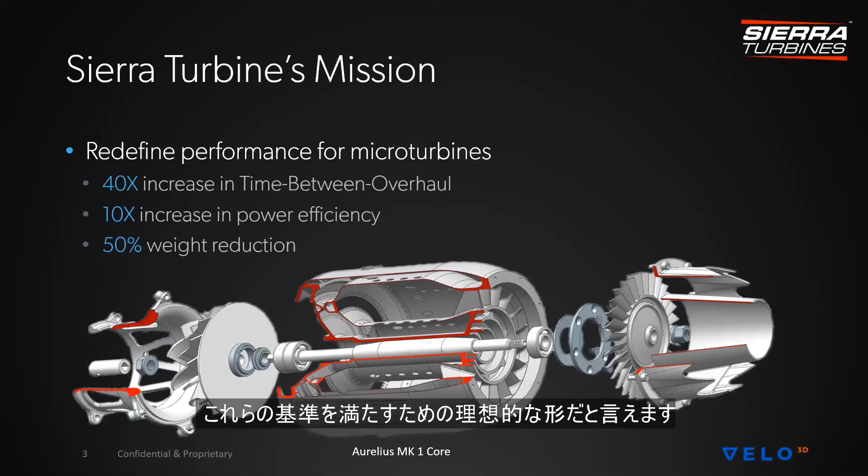So why additive manufacturing? Additive manufacturing allows us to do part consolidation. For a micro turbine, reducing 61 different sub-assemblies into one is enabled by additive. By that, we're talking about the fuel injection, bearing housing, conformal cooling channels, and conformal oil lubrication channels. So it's a significant consolidation of different assemblies into one unibodied assembly that allows also for lightweighting.

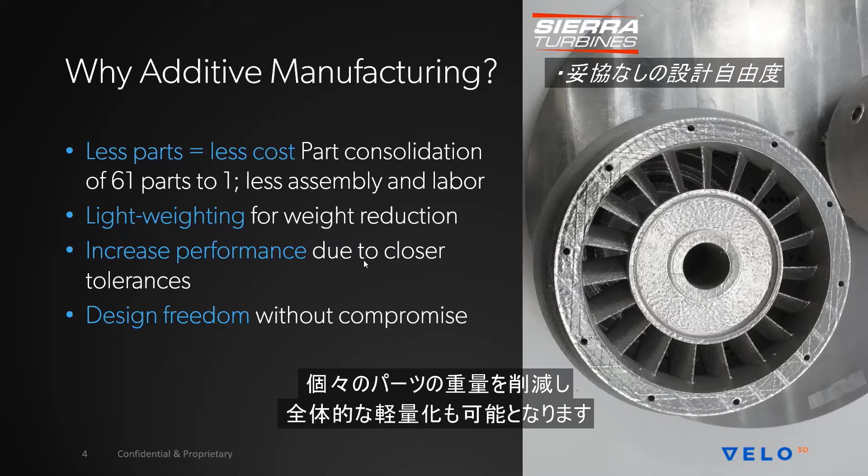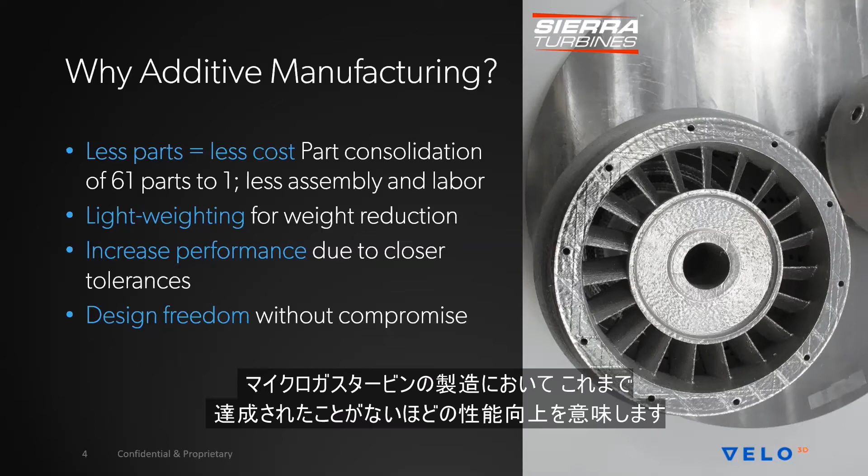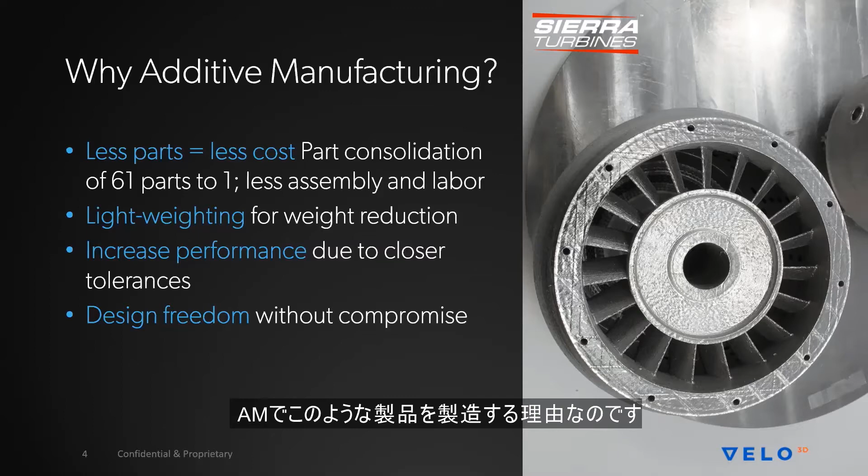By reduction of the individual components, we can lightweight this part where, compared to existing competitive engines in this category, we've cut the weight by 50%. For aerospace applications, when you cut your weight by 50%, that's automatically part of the increased performance that has never been accomplished for these small gas turbines. It's the design freedom of the Velo platform, it's the design freedom with the nTopology platform that together is the why additive manufacturing for this level of a component.

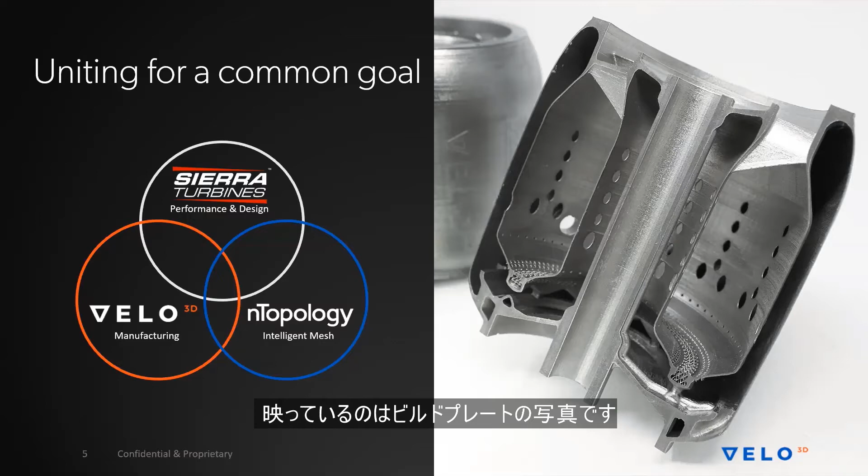And so the uniting for a common goal. I think sometimes it's difficult when you see metal parts, you don't have an appreciation for what post-processing may have been involved. What we're actually looking at in this photo is, right off the build plate, there has been zero post-processing because the Velo platform is a support-free, non-contact recoater blade system. This is testament to the work of Sierra Turbines, Velo3D, and nTopology as to how we were able to build and produce multiple parts, multiple engine cores using this advanced workflow.

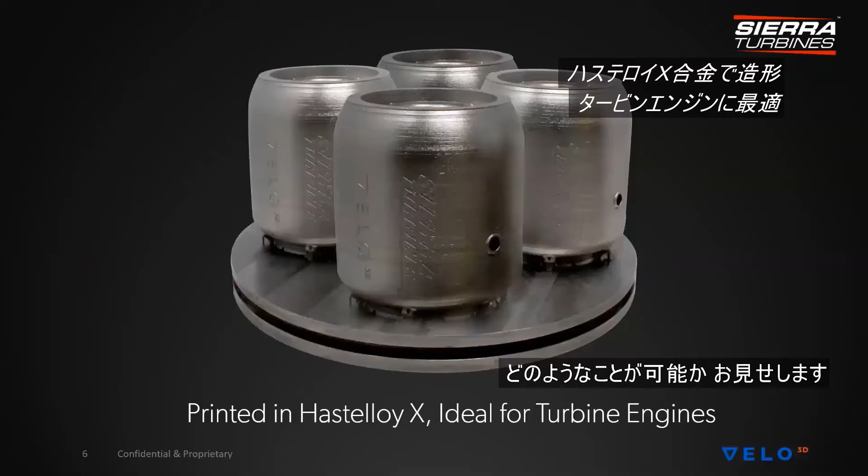As proof to what's absolutely possible, here is essentially, right out of the Velo3D Sapphire build system, we're able to print multiple of our engine cores at once.

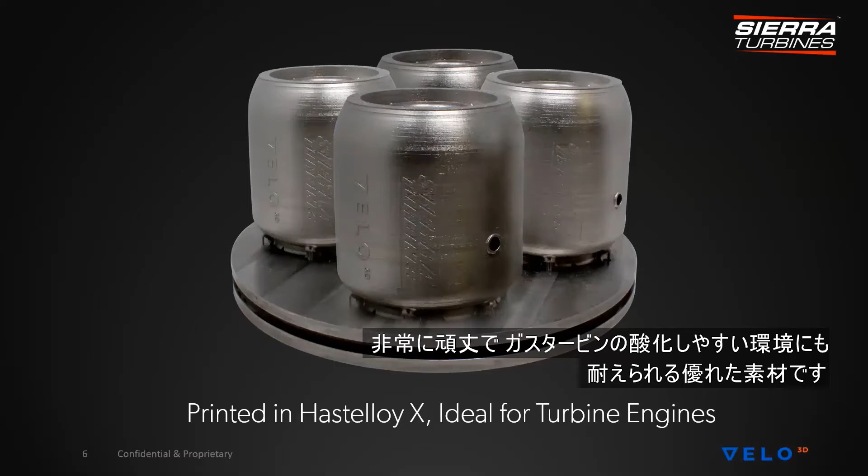I want to talk a little bit about Hastelloy X because we're pleased that this is the commercial launch of Velo's Hastelloy X platform. Hastelloy X is the material used today in existing gas turbines that are operating for thousands of hours. It's an incredibly robust material in which its performance in the highly oxidative environment of a gas turbine truly excels. We're pleased to be working with Velo to be able to showcase what is entirely possible right off of the build platform.

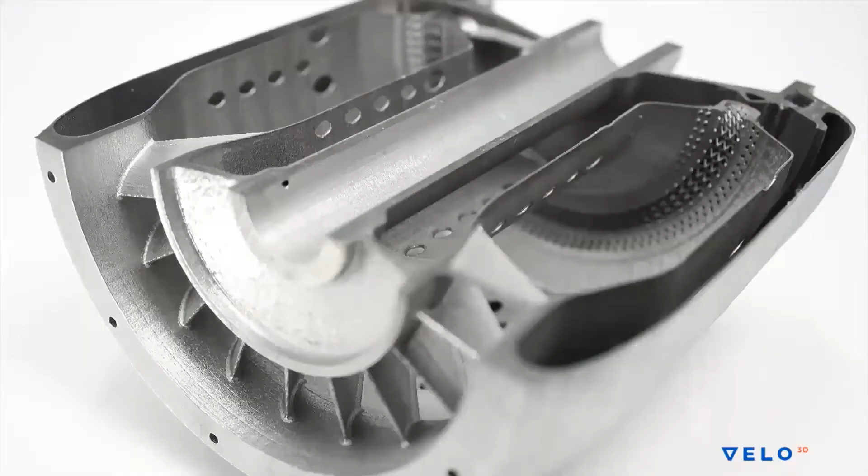Here's testament to the support-free, non-contact recoater blade system on the Velo3D. This represents zero post-processing. And what is particularly important to Sierra Turbines and also to the manufacturing of microgas turbines is what we call the gas path. This is a very close-up and real possibility of what's possible.

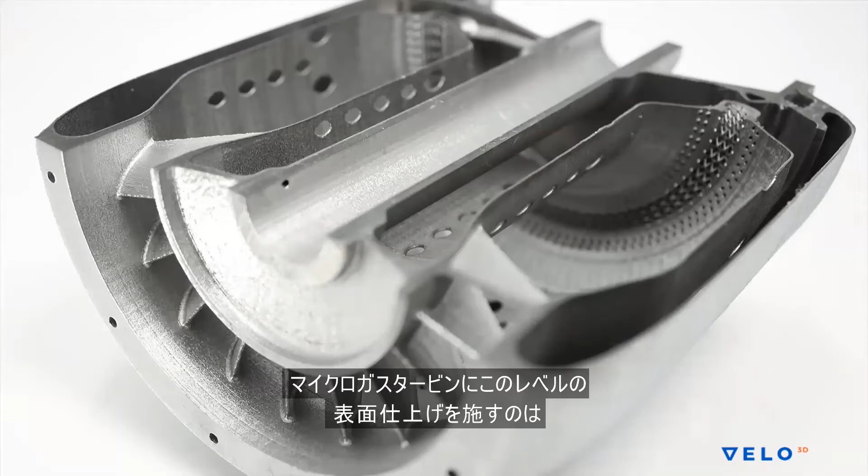Here we see the turbine inlet vanes as printed. There's zero post-processing on this image. And we believe this is literally the first time in history that you've been able to get this level of surface finish on a small, compact gas turbine.

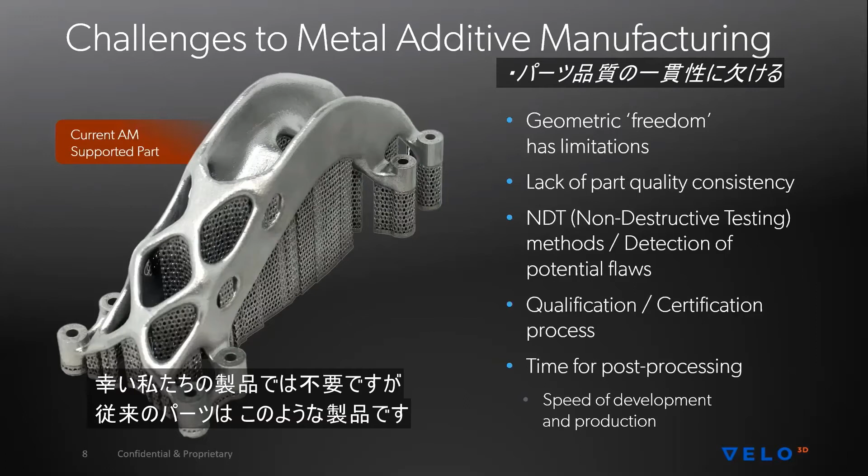So, challenges of metal AM. This is what we're seeing here in this photo, essentially the current state of the art as it exists. To be clear, this is not what we experienced at Sierra Turbines. Post-processing of additively manufactured parts requires massive amounts of support removal. Fortunately, this is not our part, but it's representative of what you'd see with other platforms today.

If this material were Hastelloy X, the cost just to post-process and remove these supports would outweigh the benefits of using additive manufacturing, even with the consolidation of 61 parts into one. This is a very real situation of some of the challenges unlocked with the Velo3D platform. So in addition to geometric freedom, which comes with support constraints, all of these additional post-processing certification challenges of additively manufactured parts are completely removed with the Velo3D system.

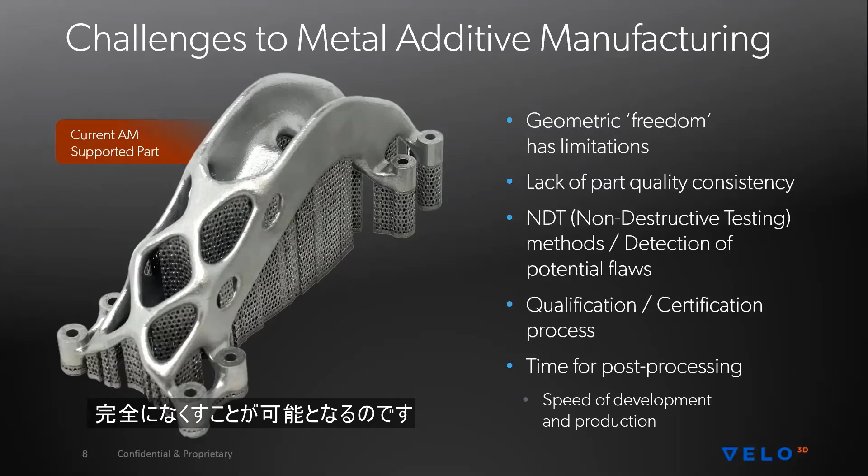Over to you, Will. Thank you, Roger.

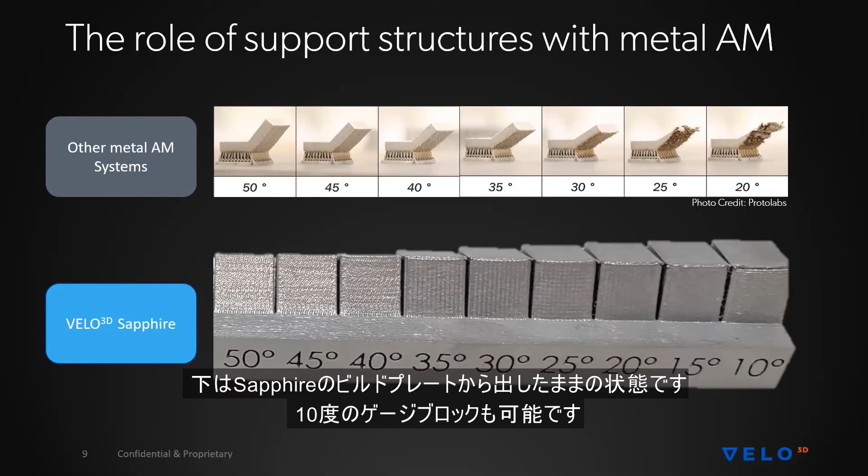And yet on the Sapphire system, this is just as it came off the build plate, you can see this gauge block here where we're printing down to 10 degrees. In certain cases, we can actually print at 0 degrees as well, with very consistent and clean surface finish. As Roger mentioned before, this is really key when you're dealing with flow path surfaces, where surface roughness is a key concern.

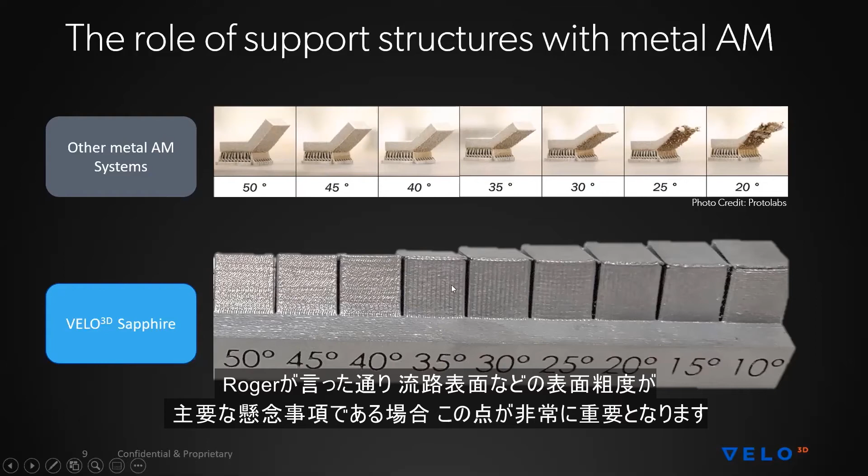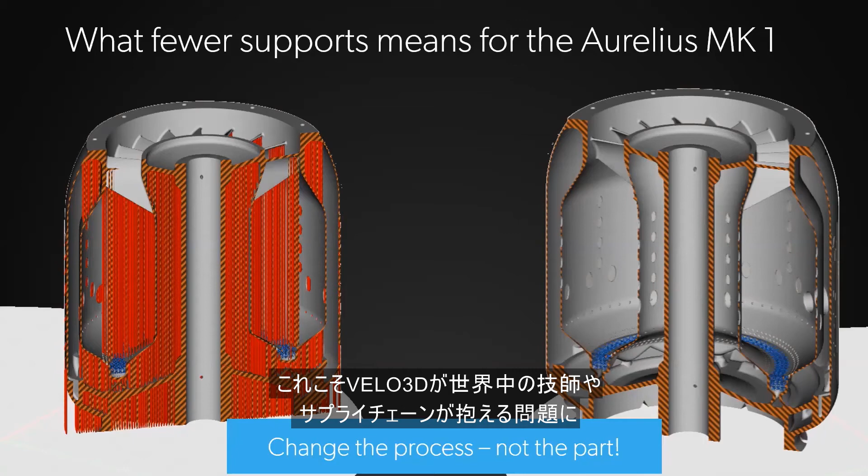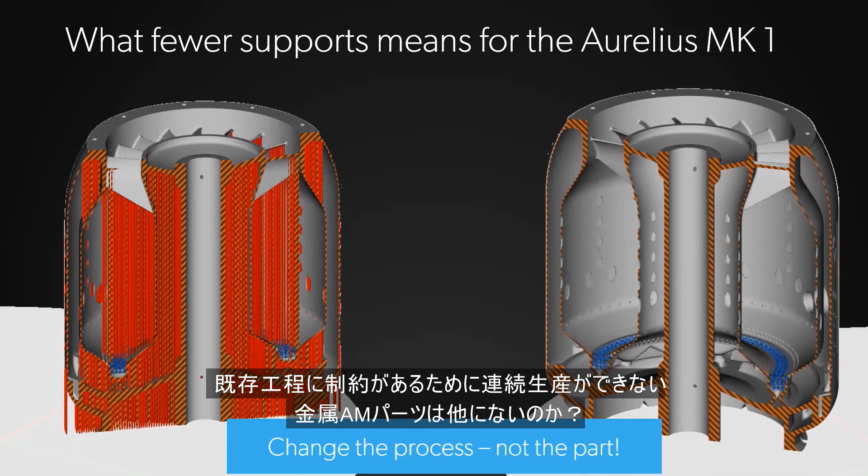So we handed this over to our process engineering team, and they came up with new processes to print these very low angle, thin airfoils beautifully straight out of the printer. This is really a testament to how Velo3D goes about enabling engineers and supply chains across the world. It's not about changing the part to fit the manufacturing process. It's about finding the next challenge, the next metal AM part being held back from serial production because of the limitations of existing processes. Those are the parts we live for, that we desire to work on every single day: what's the next impossible part we need to tackle.

Additionally, the mesh that we'll be talking through next with Ryan was brought into the Flow software. From there, a Velo build file and print file was created, and this file can be printed on any Sapphire system that has Hastelloy X worldwide. This is a great aspect of the Sapphire system, it allows the Sierra Turbines team to have a more robust supply chain, not just tied to one single printer in a certain location, but worldwide, being able to scale the supply chain.

And then finally, we'll be talking about the SURE system, which is really the quality validation aspect. Once the part's done, how can you confirm that the build went according to plan without having to cut it open and destroy the part?

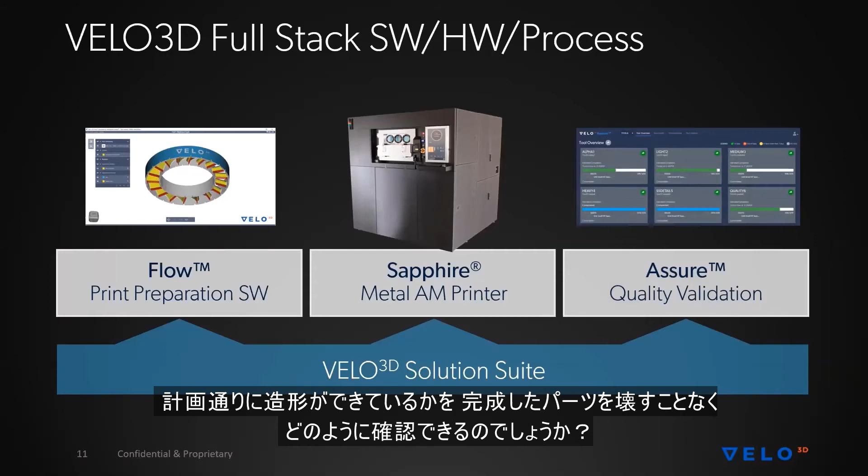Looking here as well, just a few points about the printer. First off, we have a 315 millimeter diameter build plate, and it's 400 millimeters tall. So as the Sierra Turbines team thinks about larger and larger turbines, we can support them for quite a while to serve their needs. Additionally, we have dual 1 kilowatt lasers in our system. The materials available are Inco 718, titanium 6-4, F357, and Hastelloy X now, which we've been working with the Sierra Turbines team for the last several months.

And then finally, we have the non-contact recoater, which really is a key aspect of enabling engineers to have that design freedom.

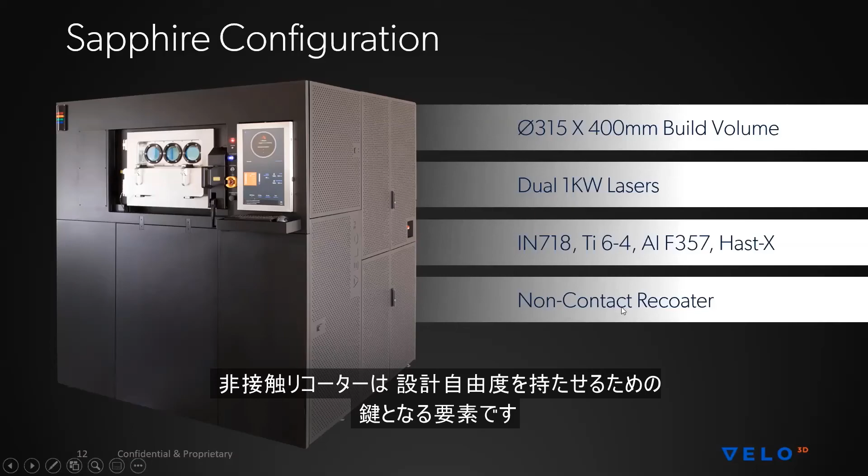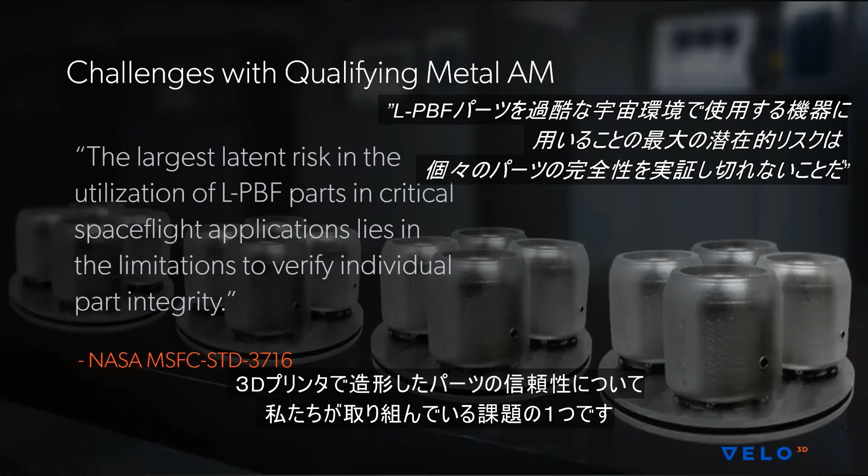Looking at the quality aspects, this is from a NASA document, but really one of the key challenges that we're also working to address is confidence in the 3D printed parts. This is attributed to both the process control within the Sapphire system, and then this is also logged on the Assure system.

Right here you can see these are two screenshots of the Assure build report of the specific Sierra Turbines build. We're able to calibrate before the build started the optical cleanliness, the thermal sensors, the laser alignment, and also the powder bed stability. This kind of technology to be able to calibrate a printer before the build even starts is really unparalleled and something that Velo3D is able to uniquely offer our customers at this point in time.

Additionally, you can see that we have multiple sensors. There's actually over 800 different sensors on the printer being logged during a build. You can see right here, there's peak height, for instance - this is a control chart analyzing in real time the 3D map of the powder bed that's being taken layer by layer. There's also other control charts such as the recirculation filter, and many more not shown here.

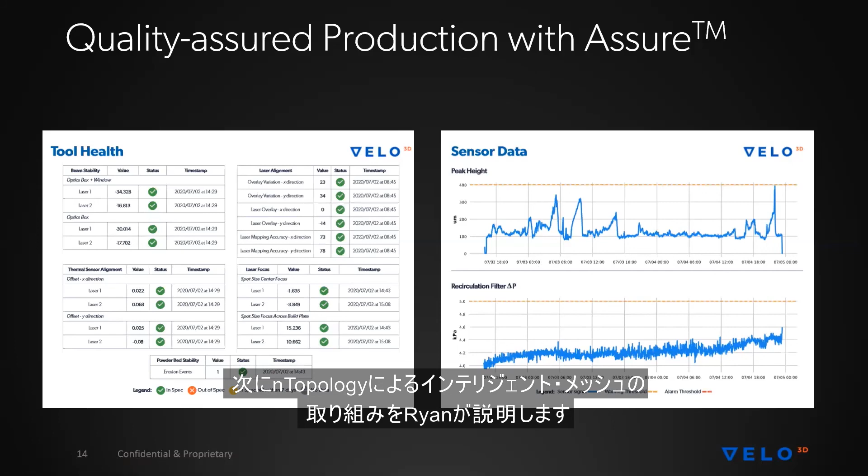And now I'll hand it over to Ryan to talk through how nTopology was able to work through the intelligent mesh.

In terms of annulus lattice generation, the nTopology platform enables our users to easily generate an annulus lattice, specifically in this case for use with combustors. What's important to Sierra Turbines is that they can explore how these lattices more efficiently atomize fuel in their combustor. A key takeaway from our software is the use of these repeated workflows so that they can not only be used in this design, but that knowledge can be gained and easily applied to downstream designs or processes with confidence that things are going to work like they expect.

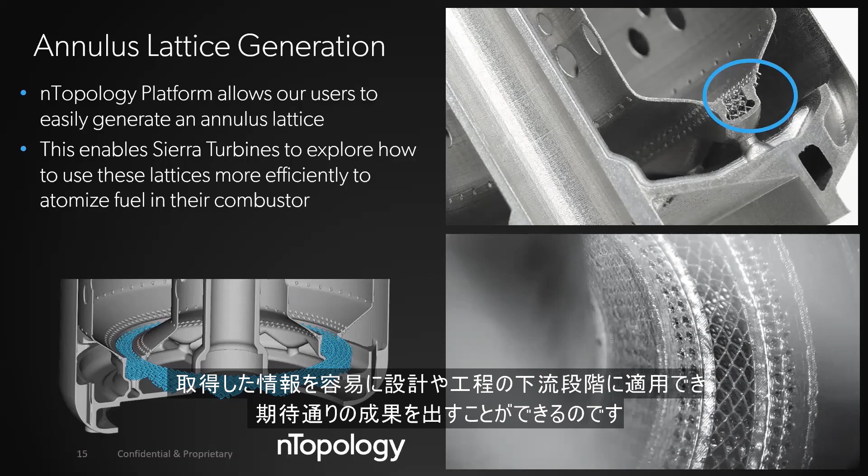And with that said, I'd like to hand it back over to Roger. So what's left for Sierra Turbines, or what's next for Sierra Turbines?

We're going to be testing and validating this in a combustive environment where we'll really put the Hastelloy X material through its paces. And the information that we learn from that will feed back into refining the design.

We're really looking forward to printing the rotating components, because this is also another area where we believe the Velo platform will shine. Additively manufactured turbines has still been seen as frontier technology, because we're not sure of what the material properties are. Everything we've seen so far, we're really looking forward to working with Velo3D on printed rotating parts.

And as a startup, Sierra Turbines is actually raising Series A funding. So, in between engineering and fundraising, we're going to be busy in the next couple of months. So thank you very much.